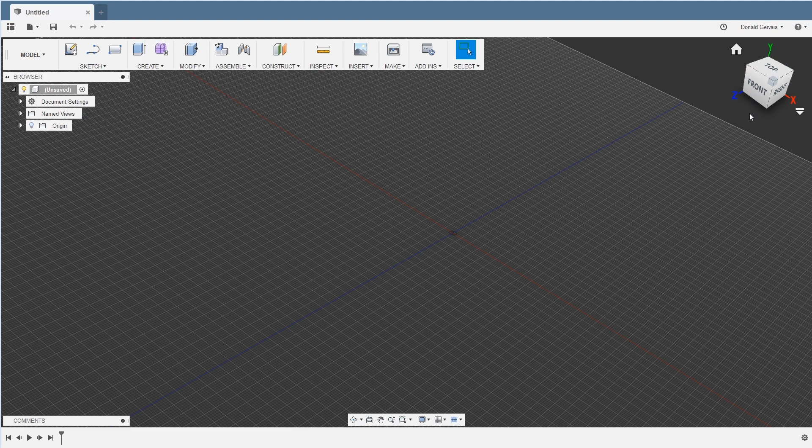I've got a new document going on right now, so this is how it looks when you first open up either a new document or Fusion 360. First, I'm going to click here at the top right corner. I've got my different orientations, so I can just hit the top, and that way I'm completely flat, looking above the surface.

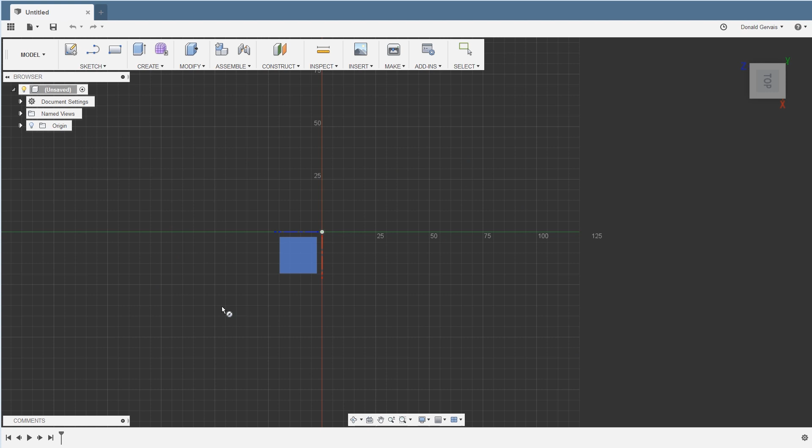First we're going to start with our two circles. I'm going to hit sketch, circle, and choose the very first one, center diameter circle. When you start a new sketch, the first thing it wants you to do, and it'll say it on screen, is select a plane, since Fusion 360 wants to know on which surface you want to draw. Right now there's nothing, so obviously you're going to be drawing on the plane. I'm just going to hit this square right here, and now I'm ready to choose a position to start my circle.

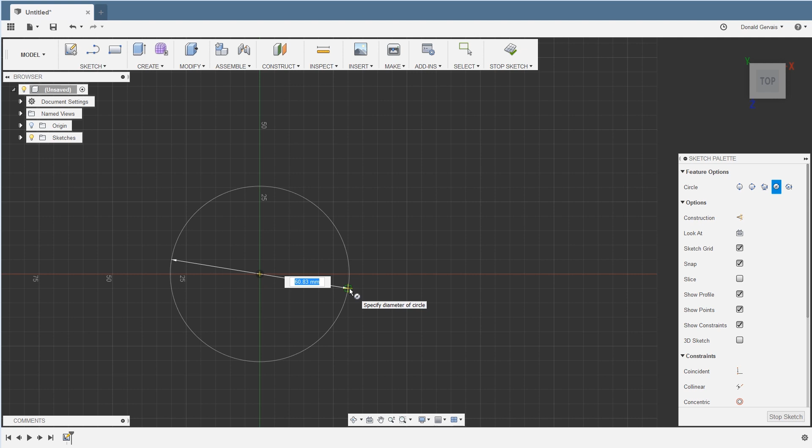So I'm going to zoom in first, and click right here. Our first circle is 25 in diameter, so I'm just going to type 25 on the keyboard, enter. So I've got my first circle, and I can click anywhere to stop moving around. Here I have my basic shape.

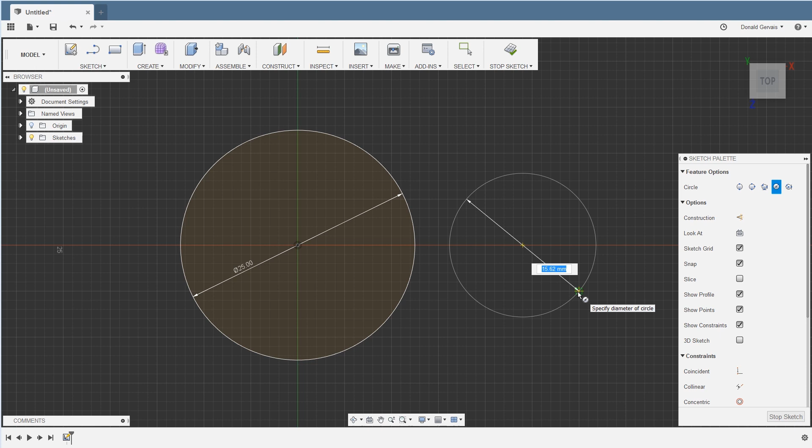I'm going to align another circle just anywhere for now, and do the same thing. I'm going to put 25, type that on the keyboard, enter, and click somewhere to stop it.

Now obviously those two circles are too close to each other, so what I'm going to do is dimension a space between the two centers. To do that, you can either hit the D key, or go into sketch and hit dimension, which is sketch dimension. I'm going to hit right here, and then right here, and I can give it a space in between. If you look at your technical sheet, you'll see the space in between is 45, so I'm going to put 4, 5, enter, and now it actually spaced my two circles appropriately for the dog tag.

This right here is not a line. This is just telling us that the distance between here and here is 45. So don't think that this is actually a line — it should not be there. It's not a line.

But I need a line now, so I'm going to go back to sketch and hit line. I want to draw a line from here to here, but if I hover around, you'll feel that it's not snapping to anything. So in order to snap, you have to start from the middle right here and then just go up, and you'll feel that it snaps now. Fusion 360 knows what we want to do.

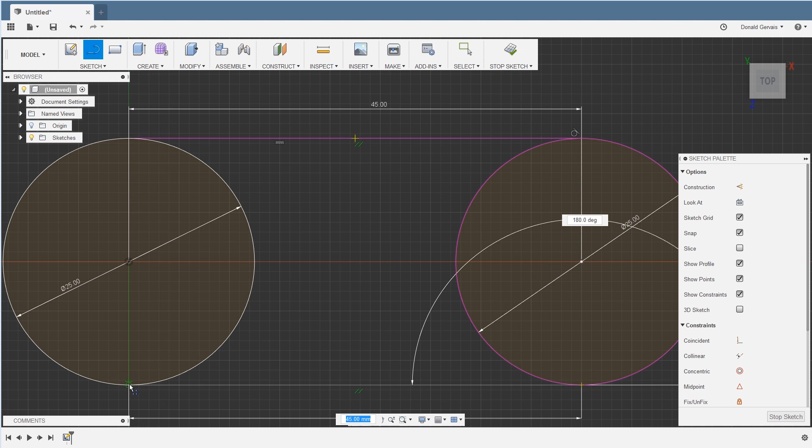Same thing at the bottom. Fusion 360 knows — see, I just come down and it just snaps. So I hit a click, another click right here, and then there we have it. We have our basic shape for our dog tag.

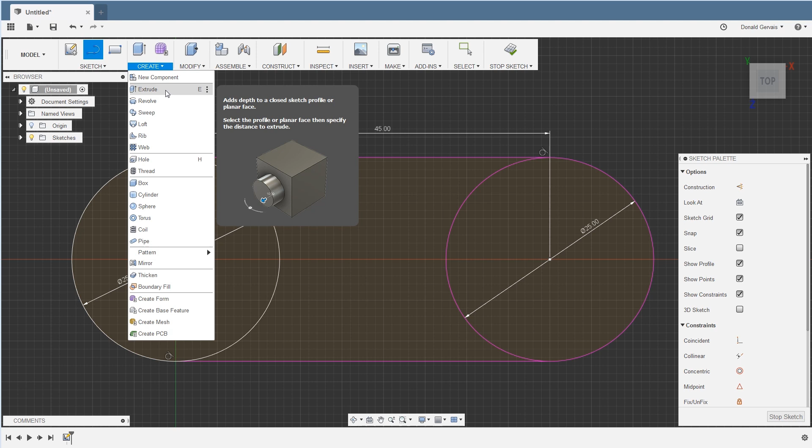Obviously this is just 2D, so what we want to do now is create a 3D shape by giving it some volume. To do that, we're going to click create. There's a little shortcut here, extrude, but if you want, you can click create and drop down to extrude, and that's going to want you to select.

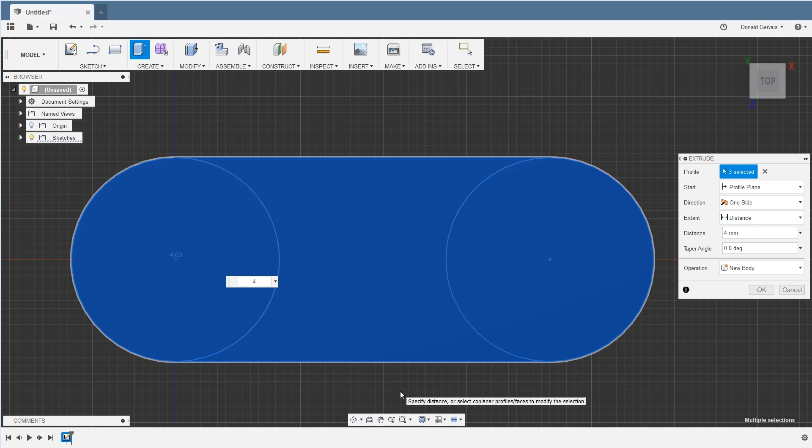I can select this, but that's not the only part I want to extrude, so I'm going to select two more. There you have it — that's the full dog tag you want to extrude. We want to extrude that by 4 millimeters, and again, that's what your technical drawing is showing. And there you have it. If I rotate just a little bit, I can see there's a thickness now to our shape.

We're ready to move on to our next step. So I moved just so I can see the thickness, and the best way to come back to a top view is just to hit the top button right here at the top right corner. So there I have it.

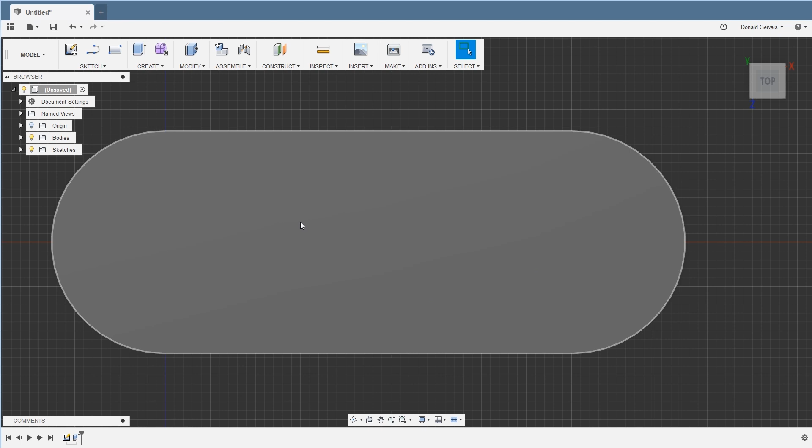Basically what we want to do is draw the exact same shape, just a little bit smaller, so that we can create a hole, a recess hole into this first part. So I'm going to sketch, and draw a circle again, same thing as we did before. Like I told you at the beginning, it wants you to select a plane or a surface. So now we want to draw on top here, on the surface, not on the plane. So I'm going to click anywhere here, and now I'm going to be drawing on top of this surface.

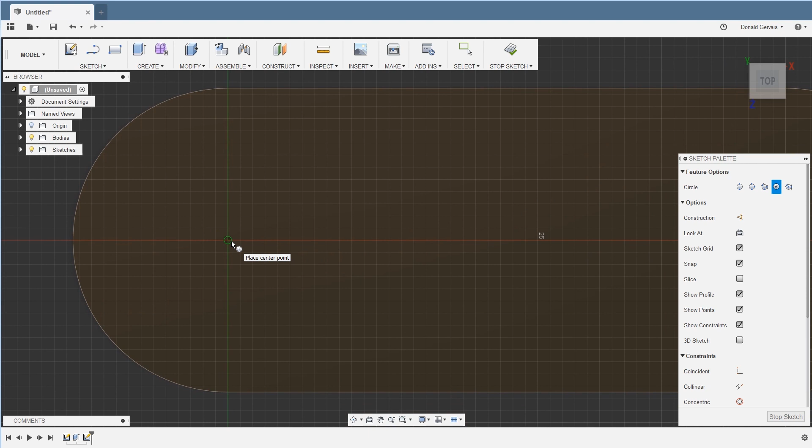Zooming in is always helpful because then you can see better what you're doing. Don't be afraid to zoom in. We already have our middle here, so we're going to start from the same middle, but instead of doing 25 millimeters in diameter, we're going to go 22. I'm just going to enter it down the keyboard, hit enter, and as before, it wants you to lock it in by just clicking somewhere, and so we did it.

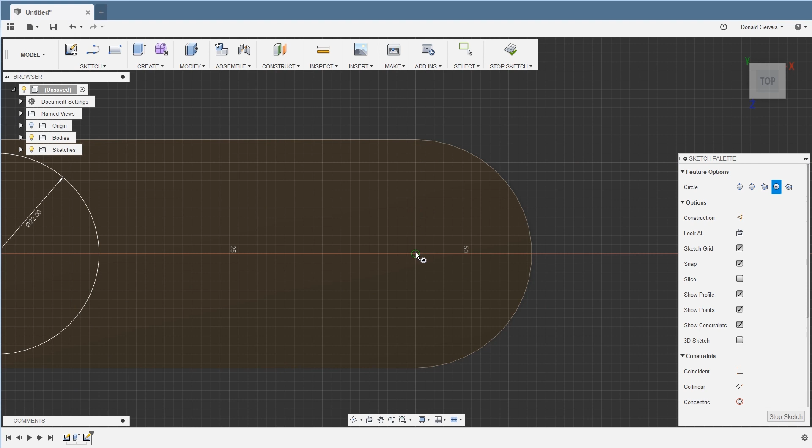We can move to the right side for another circle, and basically it's easy to align yourself. You see the middle point from before, and again I'm going to hit 22, enter. I'm going to click to lock it, and I have my two circles. They are 45 millimeters apart because we set that earlier with the sketch dimension.

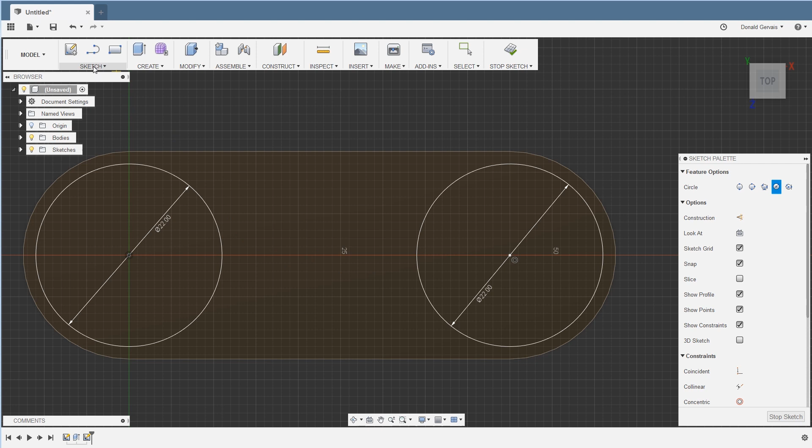All we have to do is draw again our two lines to complete this shape. If you try to extrude a shape that is not closed, it's not going to work. So sketch line, let's see if it's locked here. Is it locking? No, it's not locking. See, I feel it, I feel it.

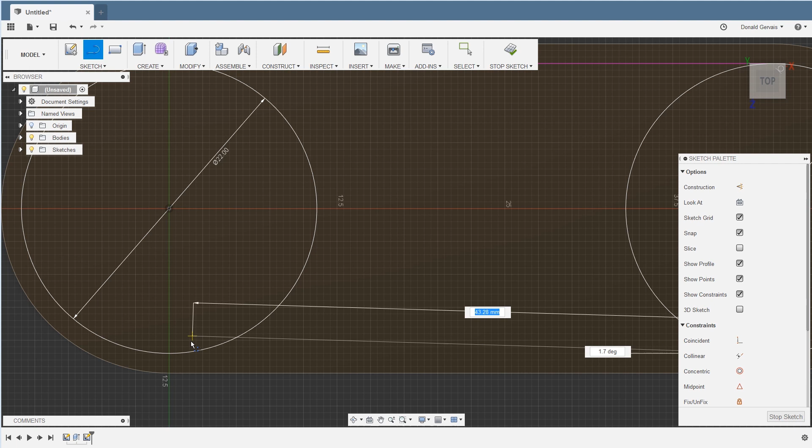So I'm going to come hover on the middle. I'm not going to click anything, I'm just hovering, and I'm going to move my mouse up slowly, and see, all of a sudden it knows that I want that middle right there. So I'm going to click, move over to the other side, and then it just snaps. It's really easy because it just kind of helps you, it knows. So another line here, it snaps right away like before. Move over to the other side, and there you go, zoom out so we can see the whole thing.

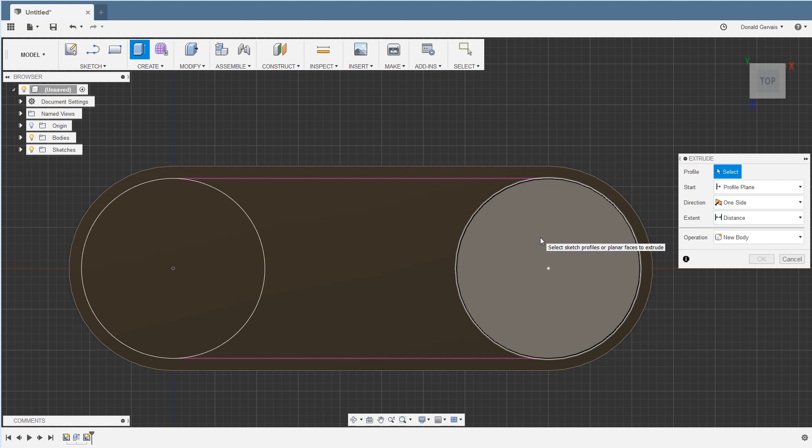So we've got our shape again that has been created for the recess hole. What we want to do is, again, we want extrude, so we can click on here or create extrude, and it wants us to select first. So we're going to select this, that, and this like we did prior, but obviously, you know, we don't want to go up. See, we could go up here, but we don't want to go up.

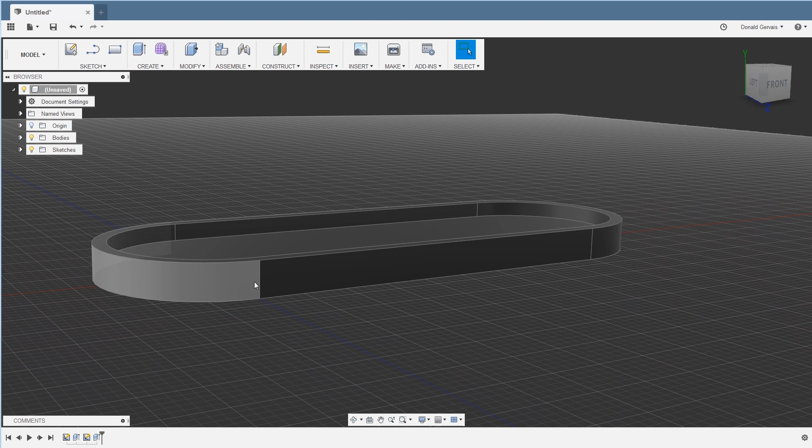We want to actually go down. So in here, you can enter -2, and you can see here we're kind of making a hole. We're extruding, cutting. Once I push enter, there you have it. You have a hole, recess, not a hole right away, but I mean this is 4 millimeters thick, and we just cut 2 millimeters into it, so it's halfway recessed in. So once again, I'm happy with this. I'm going to hit top so I can get my top view again.

We have 2 steps left. We need a hole so that we can put a chain through, and then some text, you know, for our name or something. So let's do the circle for the hole.

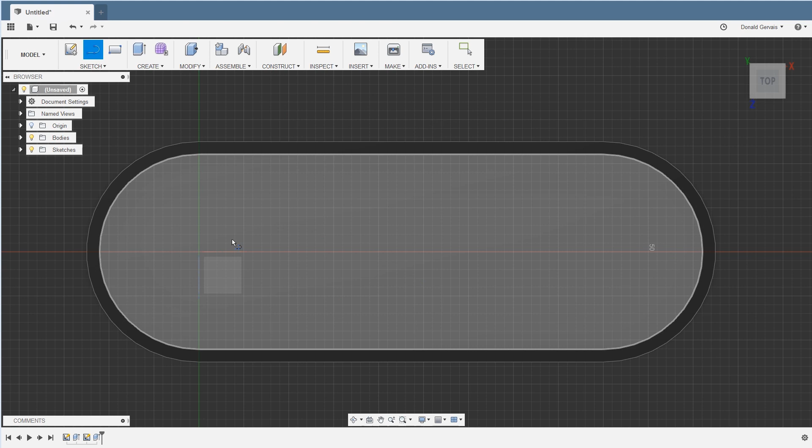Basically, if you hit sketch circle, you won't know exactly where to put the hole. So there's an actual best place for it, but we don't know where it is. So my trick here is to kind of sketch a line so that we know where the middle of that little circle is going to be. Again, I'm creating a new sketch, so it wants to know on which surface or plane I want to draw. I want to draw on the inside here, so I'm going to click anywhere in here. There you go. So we're going to start from the middle, and we're going to go left by 6.21 millimeters.

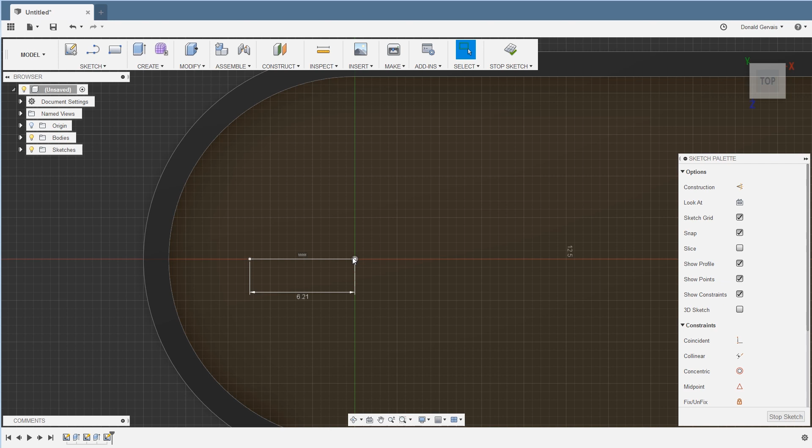So I just entered that in the keyboard to specify the length of that line, and I'm going to hit enter. You can see here I went from the middle, 6.21 millimeters left, and that right here is the center of the circle that we need for a hole.

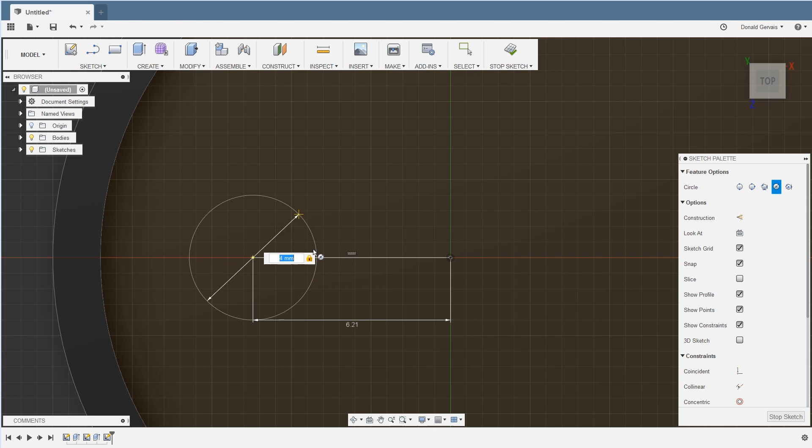Now all I have to do is hit sketch, circle, center diameter circle, and I'm going to start from that point, click. That hole, if you look at your technical sheet, is 4 millimeters in diameter, so I'm going to hit 4, enter, and as usual you can rotate it until you click to immobilize it. So there we go, we have our circle for the hole.

Once again we need to hit create, or just use the shortcut for extrude. It wants us to select, so we will select it. This line here was just a guideline for distance purposes. We want to cut through, for the remainder 2 millimeters, so -2, enter, and there you go.

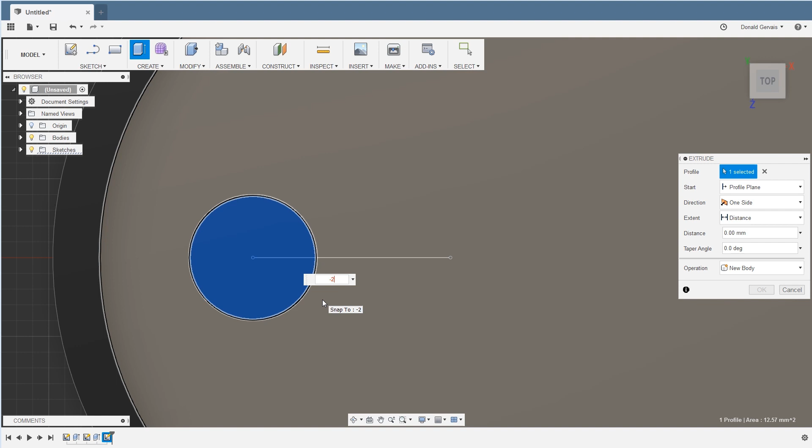If we zoom out here, we can see that we now have a hole that is well placed for the chain. I can rotate it a little bit - oh yeah, that's exactly what I'm looking for. So after I rotate, I want the top view again, so I'm going to hit top and I'm ready for my text.

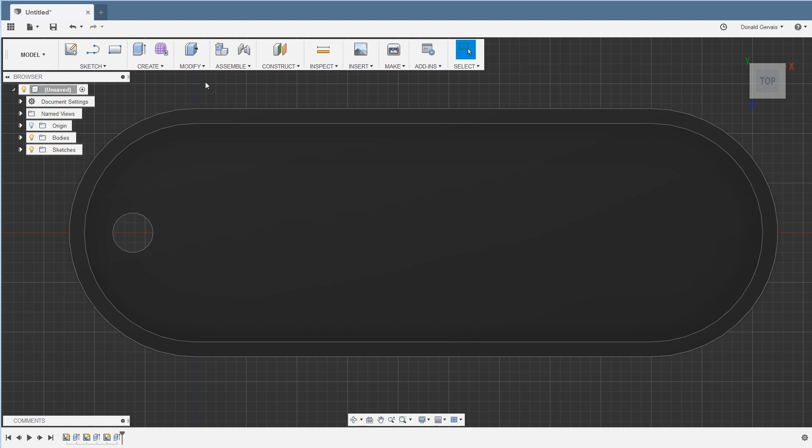I am going to sketch and drop down to text, click, and with any sketch, once again it wants to know on which plane or surface I want to sketch. I want this on the inside, so I'm going to click anywhere on here. Now it wants to know where I want to put the text. It doesn't really matter, I'm just going to hit here and we can move it later if need be.

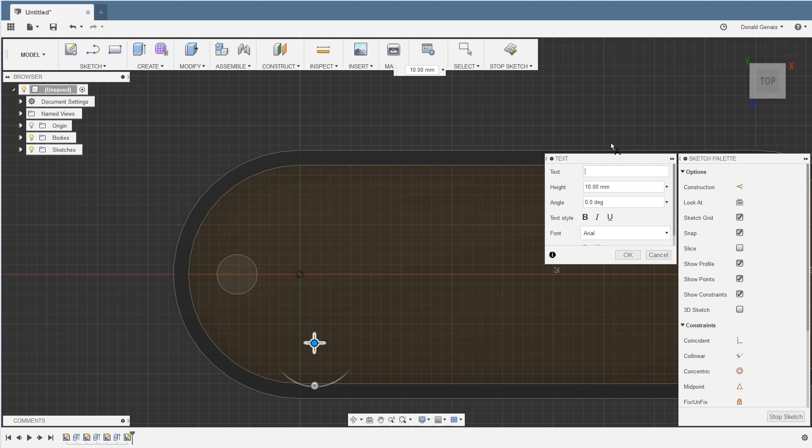So it wants to know the text. I'm just going to put GERV, G-E-R-V. I'm putting all caps, and it's coming out upside down. That's okay because there is an actual angle tab right here, so I want to turn it around 180 degrees - 180 - and there you go, you have it now.

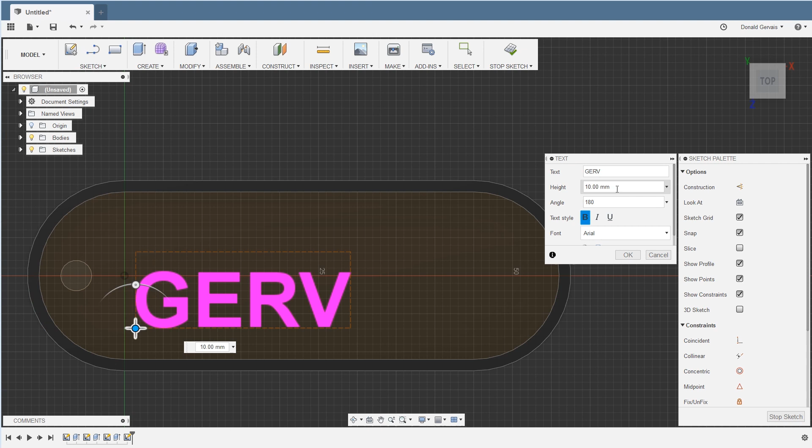It's a little bit small, too small. We want to use as much of the space as possible. First of all, I'm just going to bold it - that helps. The height is 10 millimeters, and I have room for twice that, so I'm going to put 20 millimeters. Ooh, that could be too big. So I'm going to come down here with the hand and move it around a little bit, see if it can fit. Oh, it actually fits. Perfect. So I'm going to try to center it as much as possible. Pretty happy with that, great.

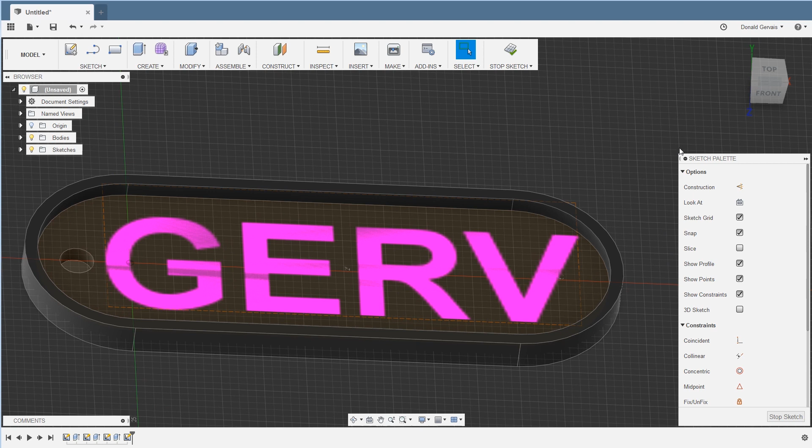Now obviously if you turn, you're going to see that our text is flat - well, it's because it's just a sketch. So I'm going to go ahead and create an extrusion out of the text, so I can hit the shortcut for create extrude.

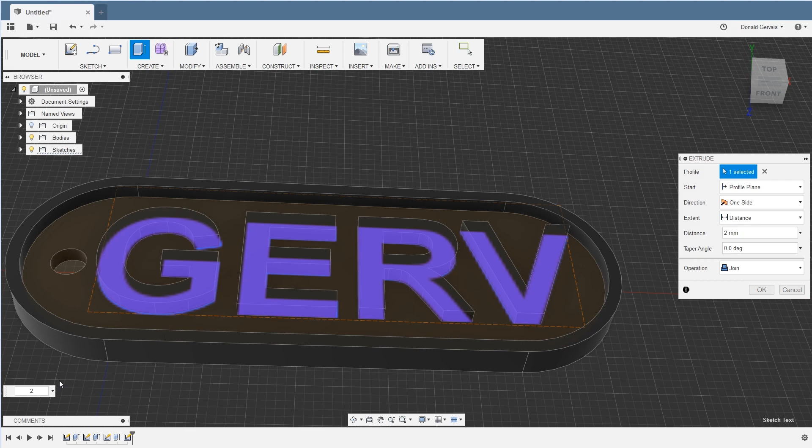Once again it wants us to select, so we are going to select the text, and then of course it wants to know by how much we want to extrude. Well, we want a volume, so we're going to put 2 millimeters, and you can kind of see here what's going on - it's not done yet because we haven't okayed that, but that looks pretty good. So I'm just going to go ahead and click OK, and there you go.

And that's it, you have your dog tag. You have the shape, you have your letters, you have the hole for the chain, and that's pretty much it.

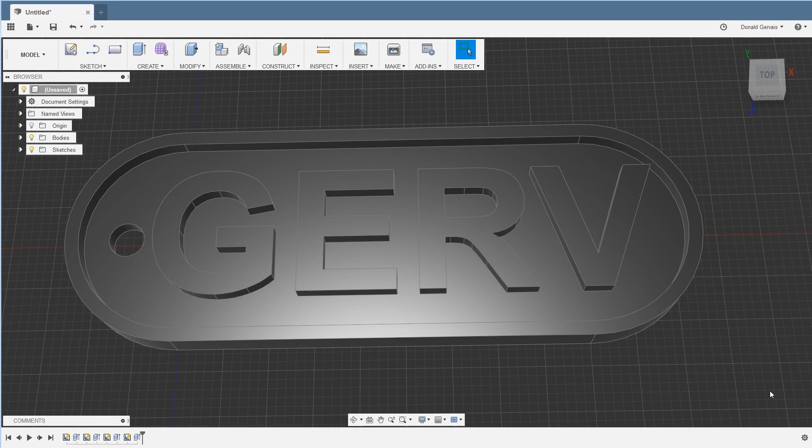So once you have that, of course you save it, and then you're going to save it as an STL because the 3D printers understand STL. So you come to File, and you're going to hit 3D Print.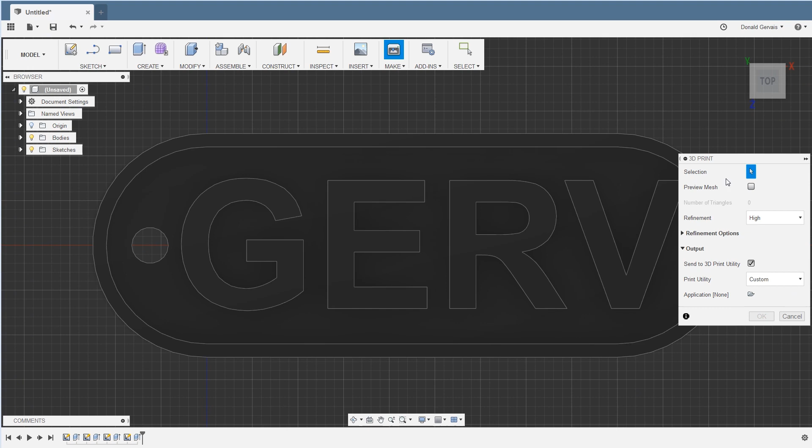It wants you to select, so of course you're going to click on it - there you go, it's selected. Make sure that the refinement is on high, you always want high. And then you're going to uncheck the Send to 3D Print utility. There you go, and now you click OK, and it's going to basically ask you to save it.

I'm not going to save it because, well, I already have it. But you save it, and that's something that you can actually send as an attachment to me.